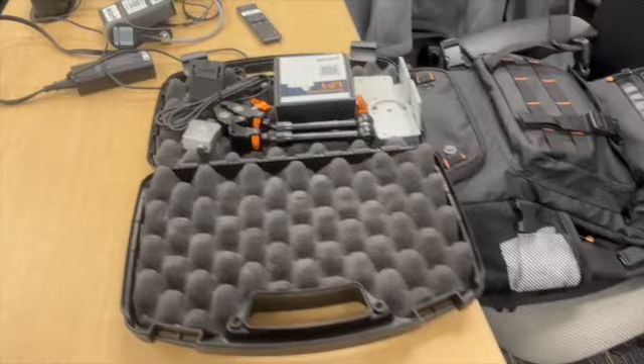And that's all going to go into a different product number, or part number. So that's the reason we do build to order, it's because we couldn't just stock everything that we can possibly offer. That being said, right now our lead times to build these things for a standard part is 6 to 10 days.

That's that we can actually ship something out the door. And if you ever need something sooner, I know you guys do a lot more systems integration, custom projects, so I don't know how often you need something last minute or if you need to do any kind of repair, but if you do ever need something last minute, we can ship out in a day or two on almost all standard products as well, so we can expedite.

Here's a little bit about our quality. We are ISO registered, but we also have a 3-year warranty on all of our products. So we really believe in the quality of our stuff. I've very rarely seen something actually end up coming under warranty, someone having to return something, just because we take a lot of pride in the products that we build.

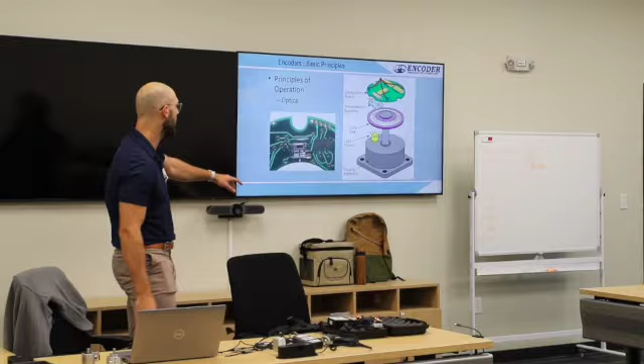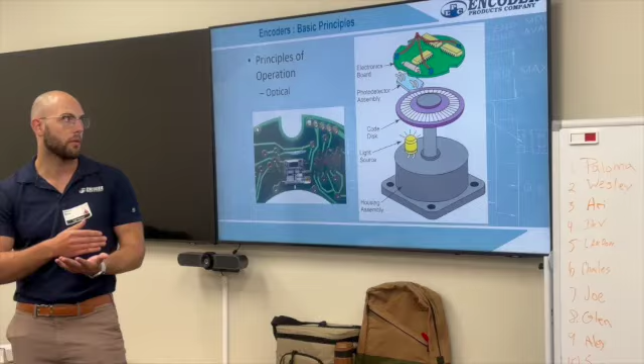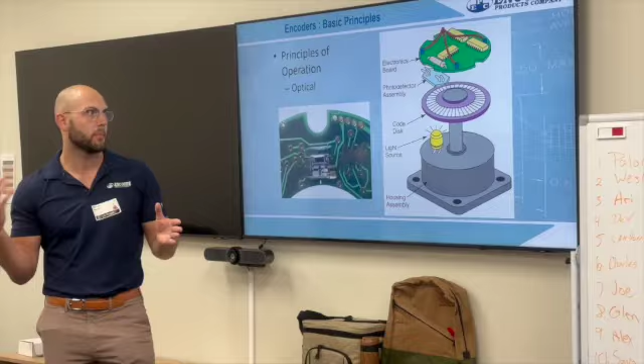Basics of how it works: you'll see there's a disc with lines and windows on it. On one side of the disc is a light, on the other side is a photo receiver. As that disc turns, it'll go through either letting light through or not. Every time that light is let through and received by the photo receiver, it knows that it's turned a certain amount of degrees. You add enough of those ticks up over time, and you'll know exactly how far you've turned, and if you know how long it's taken for those ticks to come in, you know how quickly you're turning.

The first type of encoder is the incremental encoder. These have a uniform pattern all around the disk, and they're the most common ones you'll see out in the field. They're lower cost as well because they're fairly simple. The downside, however, is that you're not going to be able to tell the direction inherently in some incremental encoders, because it just sees a tick, it doesn't know if it was going clockwise or counterclockwise. This is solved with a second set of lines underneath, slightly offset, so you'll know if I get the outer ring first, I'm going clockwise, and if I'm getting the inner ring first, I'm going counterclockwise.

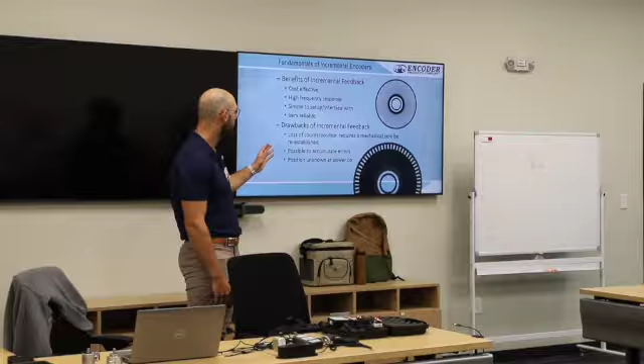And it can accumulate errors in a high vibrational environment. You can imagine the disk vibrating back and forth. All the encoder sees is that it's getting a pulse and then not a pulse. It thinks it's turning when it's actually not. So those are some of the factors you want to consider when using an incremental encoder.

But generally speaking, these are going to have the fastest response time, just because it's a photoreceiver receiving light and sending out an electrical pulse. There's no computation done by the encoder itself.

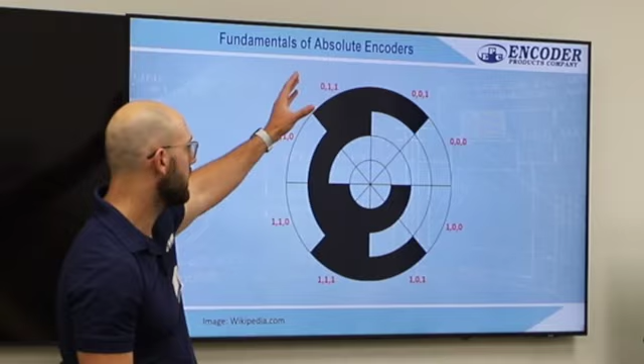The other type of encoder is an absolute encoder. Unlike the uniform pattern of an incremental encoder around the disk, this has a different pattern of lines and breaks all around, so you know when you lose power exactly what position you're at. Imagine the photoreceiver is on this section right here. With an incremental encoder, you'd lose power and lose your position because the whole disk looks the same, whereas here, everything looks different, so you'll know exactly the angle you left off at.

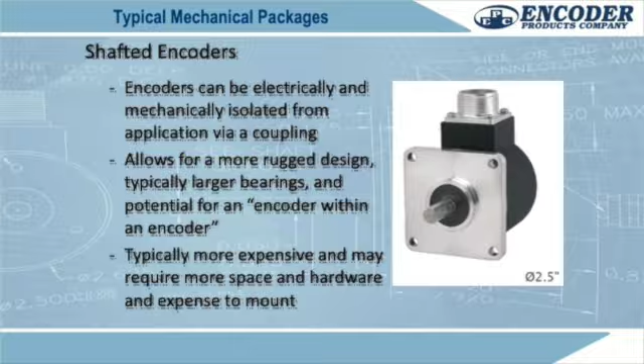Getting into mechanical packages, and these I can pass around. The first one is encoders with a shaft, something like one of these. You'd use these in more robust applications. They're able to have larger bearings, so they can self-align. Because of that, though, they also tend to be more expensive, but able to withstand higher vibration. Here's an example of one that we have, if you want to pass that around.

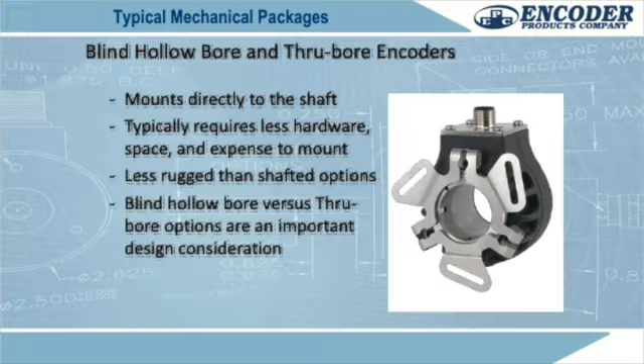Another type is the blind hollow bore encoders. I can pass one of these around too. This is a through bore rather than a hollow bore, which would just have a back to it. These mount directly to a motor shaft. So if you're a little tighter on space, or don't have the capability of actually pairing two shafts together, you'd use something like this. Because it doesn't have that mounting plate on it, it's going to be a little less robust when it comes to vibration, shock, things like that.

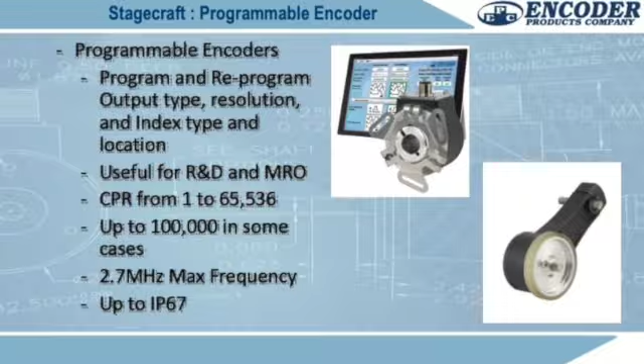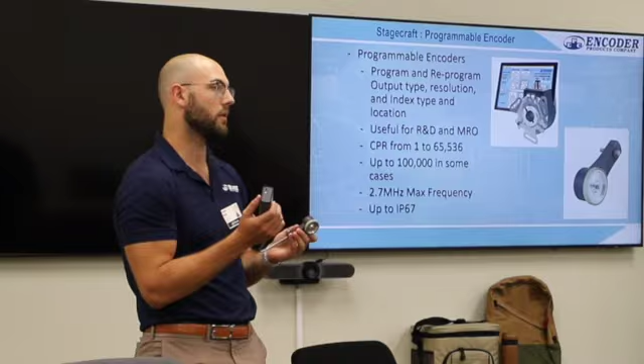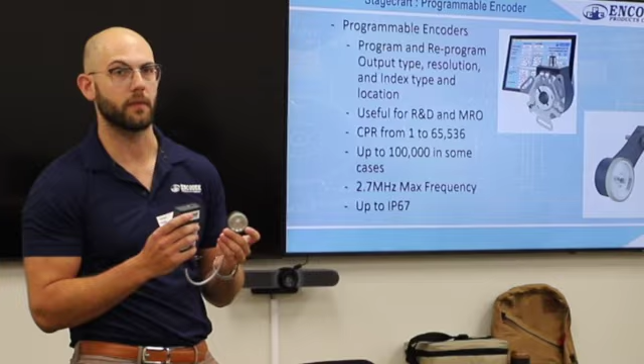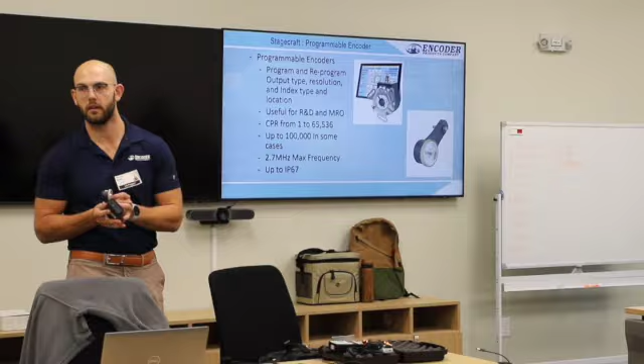Some of the encoders we make are also programmable. Here you can also see one of our wheeled encoders. These are very common in conveyance type applications, also in any kind of extrusion application where you're measuring length. These programmable encoders, I have one right here, essentially let you change the resolution to whatever you want. These are great for rapid prototyping, when you're not sure going into a project exactly what resolution you need. You could test out on this specific encoder anything from 1 to 100,000 pulses per revolution, just on the fly. And once you dial it in, you can order whatever the actual resolution is that you need.

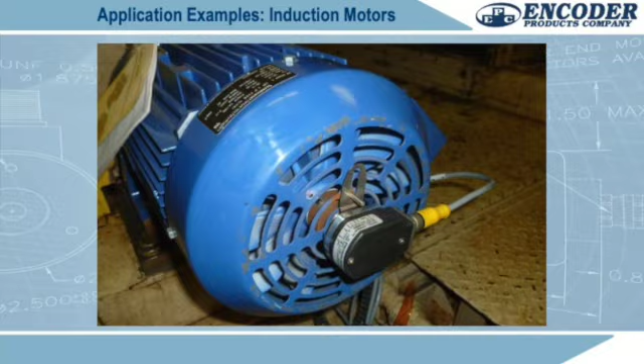I have a couple pictures of applications with these encoders. Here's one, for example, of the blind hollow bore, where the motor shaft is going into the encoder. What I want to draw attention to here is the flexible mount, which is not actually bolted down, which is how it's meant to be installed. If you were to bolt it down, the vibration of the motor would be transferred into the encoder itself, which would wear on the bearings, which, as the only real moving part of the encoder, would be the earliest point of failure. So this is here just to keep it from rotating along with the motor shaft.

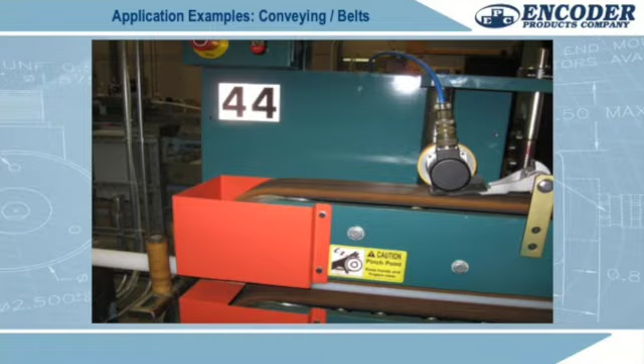Here's an example of a wheeled encoder rolling along a belt, just measuring that distance. In a lot of applications you either don't have access to the actual motor shaft, or in a case like this with a conveyor belt, you don't want any slippage. A lot of times when you're measuring something, you'll measure the motor, do your math, account for any gear ratio, and that'll eventually get you to the end product and exactly how much that is moving. But let's say the belt slips, that's not being captured by any motor movement. So you want to actually put it directly onto what you're measuring, something like the wheel on a conveyor belt.

And one more type of mechanical package we have is bearingless encoders. These are definitely less common. The one on top is our model 121.

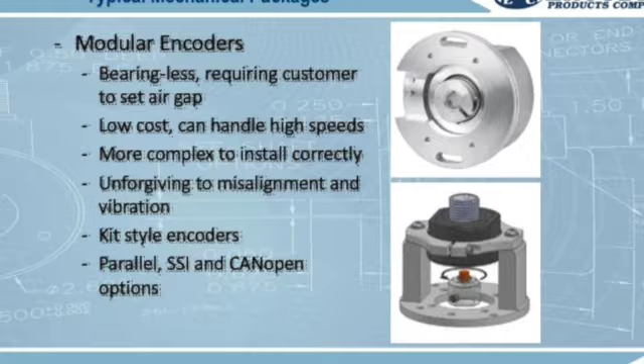The thing with these is because they don't have bearings, they don't have that mechanical point of failure, and they also don't have the friction of those bearings. So for incredibly high-speed applications, you're often going to want to use a bearingless encoder. They are definitely more work to install because you have to set that gap of air where the bearings would be yourself.

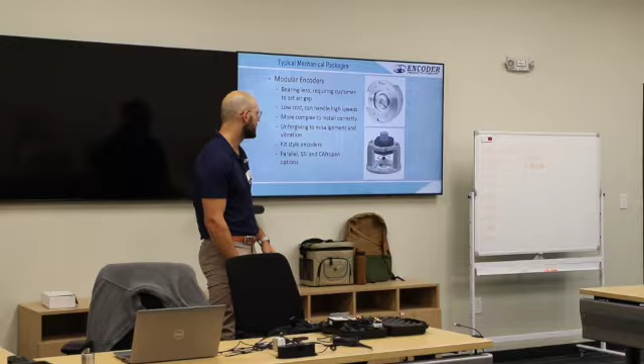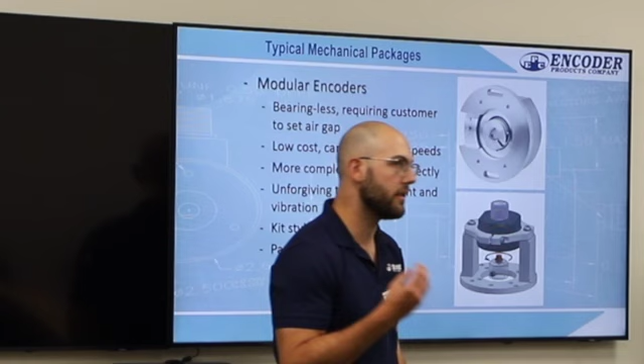They can be prone to problems if there is any slight misalignment. And then also we have our magnetic encoder, which is actually very robust because, again, there are no moving parts. The way it works is that there's a magnet mounted to a shaft, this little orange magnet right here, and then there's a divot in the magnetic encoder with its magnetic poles around it. So as that magnet turns, it's capturing that rotation up to 1,024 pulses per revolution.

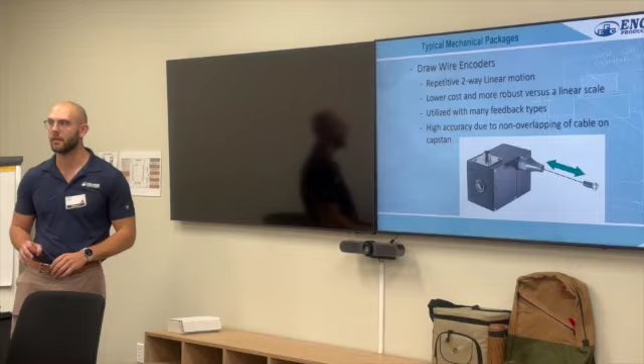And so here is our draw wire encoder. This is good for linear measurements, something like CNC tables, something like that. Also any kind of extending boom arm on a crane. You'd be able to measure any kind of linear motion. The way it works is you have the draw wire here connected to a drum, and then the drum is connected to the shaft of one of our cube encoders.

Do you guys have any questions so far? I feel like I'm running through this a little bit quick.

What's the longevity on one of those compared to just the standard rotaries? The longevity on this is going to be not quite as high, especially if it is in any kind of a harsh environment. The string there is strong, but it's also fairly brittle. It's not very flexible, and that's because, especially as you're extending over a horizontal distance, there's going to be some droop there. So in order to alleviate that, you keep it a pretty brittle cable. The problem is that once that cable, if anything does happen to it, if it does snap, or get released and just shoot back like a tape measure, it's going to fall off the drum, and we can't repair that at that point. But yeah, for controlled environments, especially in any kind of vertical extension, it's going to be pretty robust.

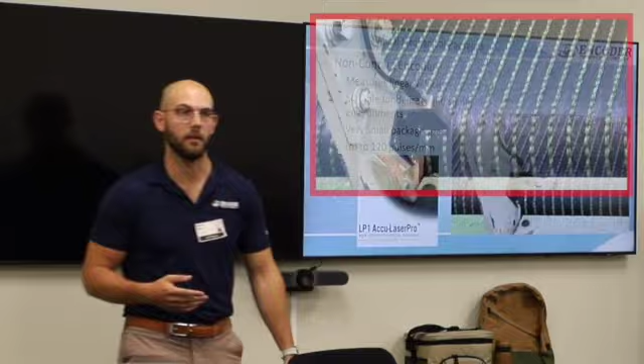And then, so next is one of our newest products. This is our LP1 non-contact encoder. I'll pass it around, but as you can see, it's only about the size of a matchbox. The way it works is it has these two lasers underneath that are taking an image of whatever it is that it's measuring, and it's used to measure the speed of a flat surface. So here, there's the underside of a turf grass mat. Let's see if I can play it. Encoder mounted right there, just measuring the velocity of, like I said, in this case, a turf grass mat.

Usually it'll be in a lot of conveyance applications, extrusion applications, oftentimes in place of the wheeled encoder. Very similar because it does do linear measurement. A little bit more niche, definitely a bit more expensive. But if you need to fit something in a small space, if you can't interact with what it is that you're measuring, think of a printing application with something like a very fine film, something that you don't want a spring-loaded wheel bearing down on. You could use something like this to capture that speed.

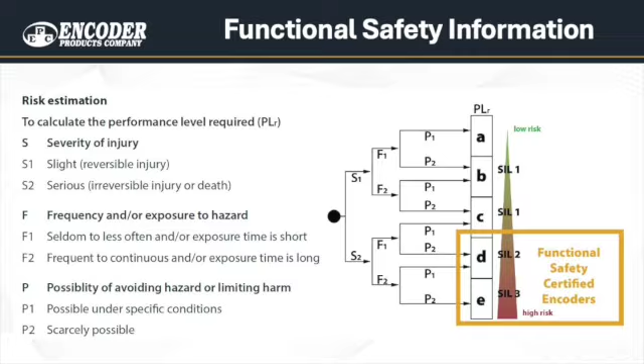I think I have more information on safety encoders here, but here's a breakdown. I can email these slides to you guys if you're interested, but just a breakdown of what it takes to define something as SIL 2 PLD, SIL 3 PLE, something like that.

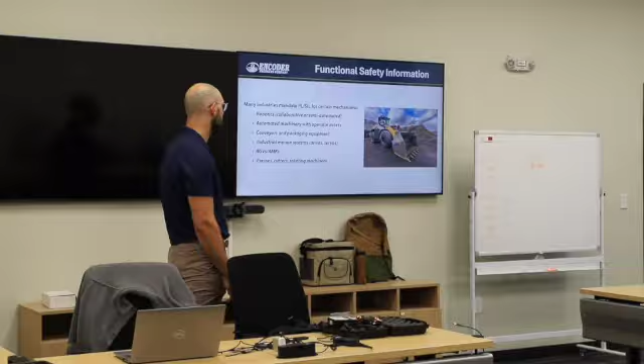And these are going to be some of the applications that you might work in that are going to require safety. Generally speaking, I assume your customers are going to request safety if they need it. But anything - collaborative robots, anything that's going to be around people, can be dangerous to people - you're going to want very likely a safety encoder, as well as safety products of other kinds, safety controllers, safety relays, in those projects.

How does a safety encoder differ from a standard multi-turn? Does it have redundant channels? Yep, yeah, so I'm glad you asked.

Basically, a lot of times you'll have, even some non-safety encoders will have redundant channels without being safety rated, still have that either multiple output or sometimes even multiple types of technology. So we've sold encoders in the past that are basically a magnetic encoder mounted to an optical encoder that share a single shaft. So what that's going to do is, let's say you have a failure that's related to the type of technology itself, you'll still have that separate type of technology. So, dust fills the encoder, and all of a sudden that disk is not giving you the reading you want - that's not going to affect the magnetic encoder, that's just going off the magnetic fields.

The way that safety encoders work is they also have two redundant channels, but instead of having those two channels checked by the PLC and comparing them, that check is done within the encoder itself. So a flag is thrown out before that signal is even given to the PLC. So it's just going to be a faster response time in case there are any issues like that, and especially if there is any kind of noise in the line - the signal for a flag is going to be thrown up versus the PLC checking for these things and having that noise be the issue itself.

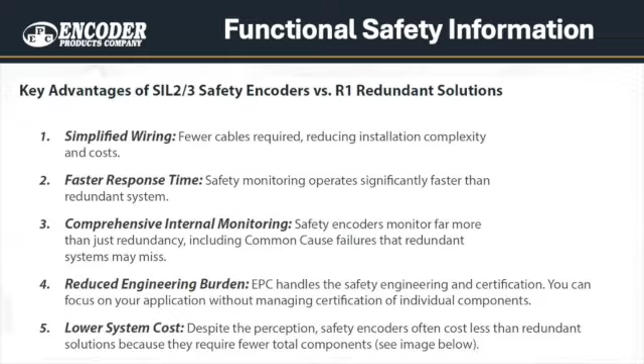Here's just some more advantages of the SIL 2 and SIL 3 encoders. The wiring is simpler because again, it's not two redundant outputs that each require their own cabling, their own wiring - it's all going to be going through a single cable. Fast response time, like I said, because the check is done within the encoder itself. Very comprehensive internal monitoring, I mentioned. And lower system costs - despite the perception, safety encoders often cost less than the redundant solution because they only require a single encoder.